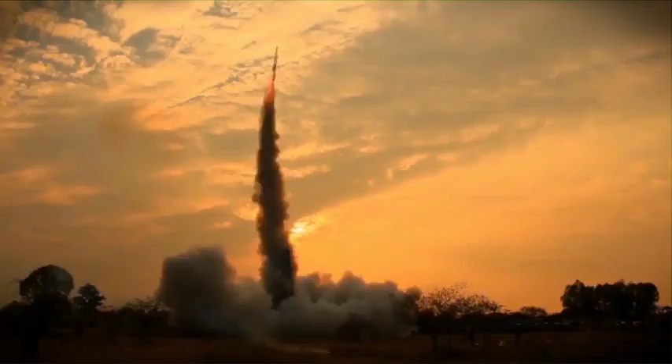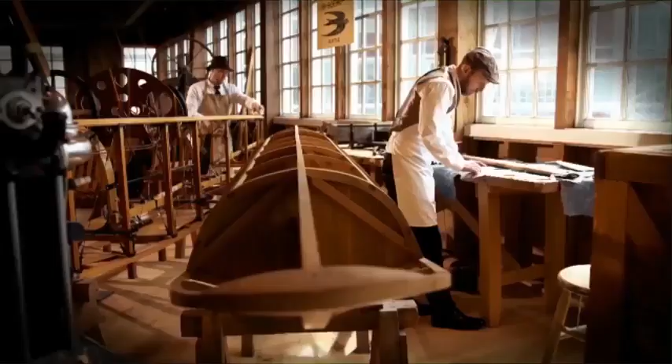There is a question as old as time, heard round the world and in every heart. It thrills the imagination and gives wings to possibility. Its footsteps fill history, and its hands hold destiny. It whispers in the dark, and its echo shakes the earth. The question called to those who came before, and they answered with the incredible. It urged them to start small and think infinite, to pursue possibilities and dream no small dream, to see a future filled with hope and unite to build something better.

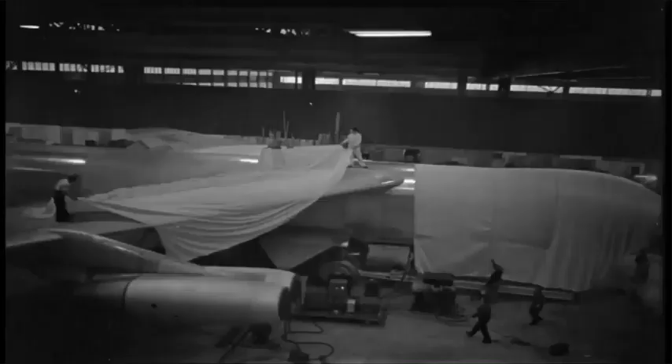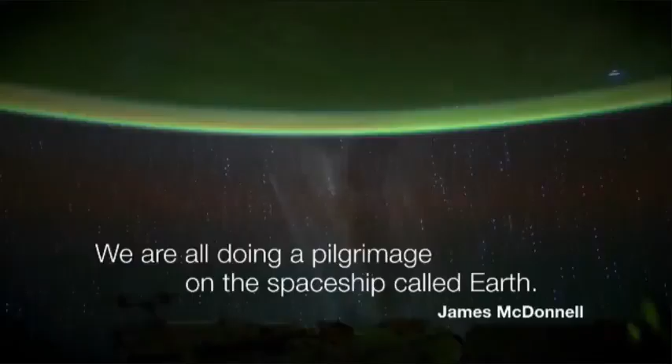Working together, they connected continents. Building the future of flight, they unlocked the stars. Leading their generation, they inspired ours. To dream high and fly far, to bind together and build the future. To lead our world and find new ones. To honor their legacy and leave our own. Our founders heard the call, and their answer lives on. From ocean waves to the edge of space, through our first century and into the next, their memory remains. Now, it's our turn. The question is calling louder than ever. What will we dream next?

All right. So I know it's after lunch, and it's in a dark room, and I've been in your seat before, so I want to get some interaction going. Let me ask a question. How many of you flew here to Boston? Just maybe take this opportunity to stretch.

And how many of you flew on a Boeing airplane? Lots of hands. How many of you weren't paying attention to what airplane you're on? You're just worried about what seat you were going to be sitting in. And that's not uncommon. In fact, if you think about what air travel has become today, we take it for granted. So I love the video that started this with looking forward 100 years.

So let's think about going back 100 years. What if we could travel back 100 years and you explain to someone what air travel would be like in 2018? Looking back in 1918, I think the Sopwith Camel biplane was the in-airplane. And so what would that be like?

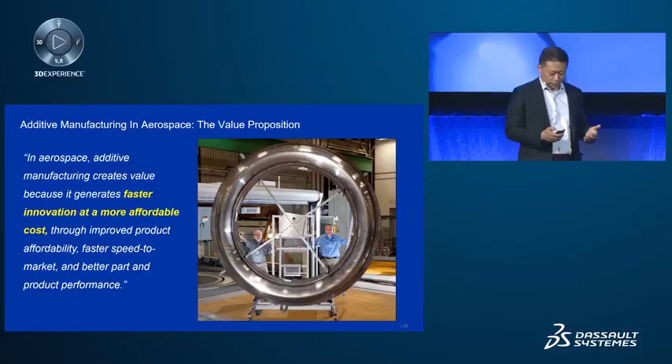So when we look at additive manufacturing today, it's really the next leap in technology, but it's very similar to the products we have. Instead of loggers and miners and metal forgers, now we're talking about spheroidizers and people who will make the powders that will produce the parts that we hope to make in the future.

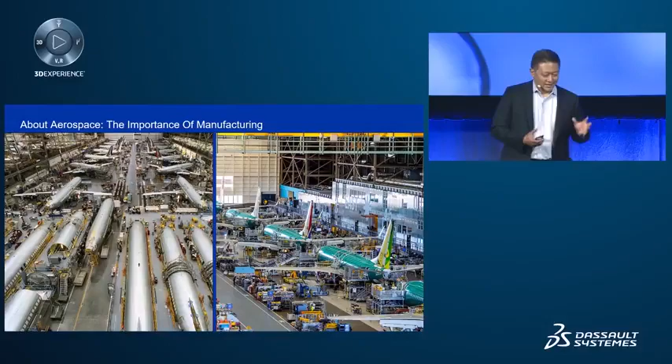The photo here on the left is our 737 factory of about a decade ago. You can see it looks very busy. It's got many bottlenecks in it. And as that production system started to advance and try to go faster, we just continued to find more and more challenges. And on the right is a photo of today's factory in Renton.

This moving line is one of multiple identical moving lines that are producing 47 airplanes a month today, going to 52 later this year, and 57 airplanes a month next year. That speed and velocity is tremendous for us. We've never gone faster in any production line, and additive manufacturing is one of the keys that we're using to help deliver that production system.

On the left, a manufacturing technician on the floor, if she needed some tool to help her build the airplane easier, would go to a tool design engineer, and then that tool design engineer might come up with something new and send it out to one of our suppliers, and maybe 1 or 2 or 3 months later, a tool would show up that would help to build the airplane better.

At today's production rates, more than 100 airplanes could go by before one of these parts could show up. So today we are deploying additive manufacturing down to the factory floor. We have engineers, tool designers, and 3D printers located on the shop floor, and it is enabling us to take sketches and turn those into tools and parts that help to build the airplane maybe the next day. And this kind of technology is something that we've applied, and it's really one of the keys that are helping us to move forward.

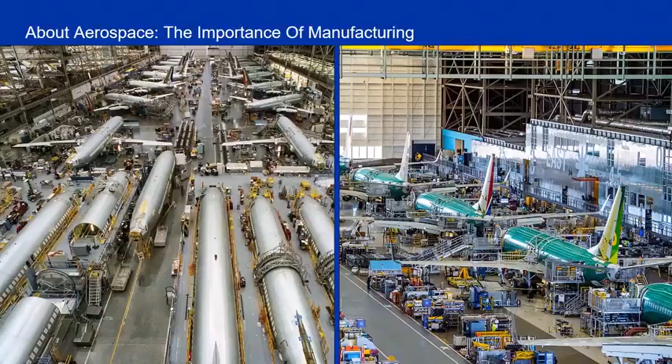On the left there is a galley fitting. It supports the galley on the 787. It's made of titanium, and it's a 3D printed part. It looks very similar to the machined part, but it was made using a 3D printing process called titanium wire feed. And it is the first FAA-approved structural titanium part to be flown on a commercial aircraft. And as of now, we're delivering them on all of our 787s.

And this part is made with an additive process where the wire bead of titanium is put down just where it's needed, and it's something we call a buy-to-fly improvement. Traditionally, this part would be made with a block of titanium, which is very difficult to machine and very expensive. And with this process, we're able to put just the right amount of material in the right places, and then significantly reduce the amount of machining that's required in order to produce the part.

On the right is a prototype we have. It's called the snubber fitting. I have one in my pocket here, and I think it's maybe visible on the screen. It's a topology optimized design using generative design software tools, and it is on the 777 today. And we have created this to replace an existing machined part. It also has a very good buy-to-fly improvement.

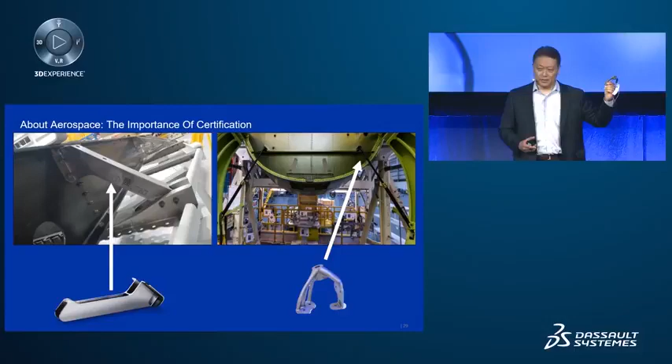This was built using a titanium powder bed technology, and it has just recently flown on the ecoDemonstrator program at Boeing. It was a partnership between Boeing and Federal Express, and we flew this on a 777 freighter for several months, along with about 30 other new advanced technologies. And this part is one of our first that we're trying to additively produce using titanium powder bed technologies and move that towards production.

So Boeing is not new to additive manufacturing. In fact, we have been in the business for roughly 20 or more years, and we started with things like stereolithography. Very first 3D printing, when I first started at the company, I remember having these yellow models that were just basically polymers that had been 3D printed, and they were very expensive. And as we've seen over time now, my kids are using their desktop printers in their classrooms. And engineers all over the company are now coming into the workforce with 3D printer experience.

But the proliferation of that technology, I think, is still in its infancy. We are really just starting to see how the technology is taking off. But at Boeing, we have been doing this for a while. It's been more than 15 years since we put the first 3D printed part onto one of our aircraft. We have a number of parts flying today, both in commercial and military aircraft. More than 60,000 parts are currently flying. Many of those are polymers. And what we're seeing today is an advancement of new metals technologies, and that, I think, is where a lot of this industry is headed.

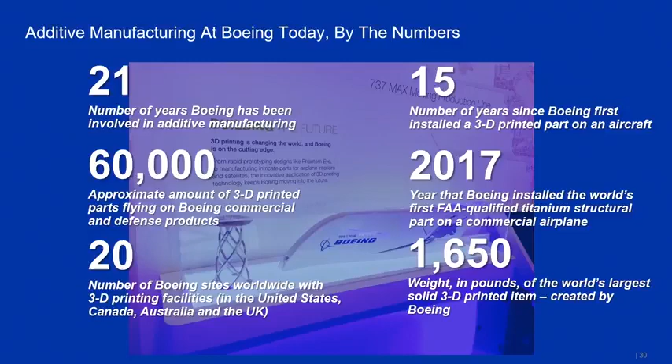We also created the largest solid 3D printed item, and I'll show you a video just here in a moment, together with our partners at Oak Ridge National Labs. So maybe we'll go to that, and let's see if we can get this to play.

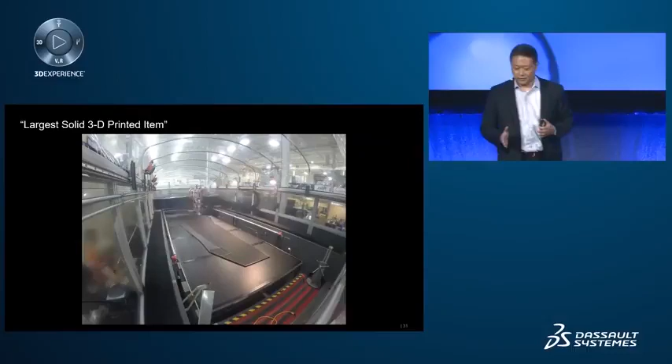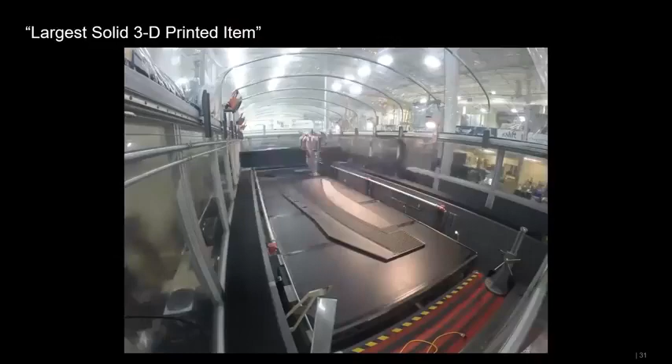So it doesn't have any sound, but this is a large area polymer printer at Oak Ridge National Labs that Boeing partnered with to fabricate a tool for development of the 777X program. And at one point, this was the world record holder as the largest 3D printed item. It was over 1,600 pounds, and I'm told it took more than 30 hours to print. And it's a little long, but you can kind of see 30 hours sped up over a few seconds. So maybe we'll watch this just for a moment. You might be able to pick out what kind of tool it was for by the shape of what's happening in the middle of that printer there.

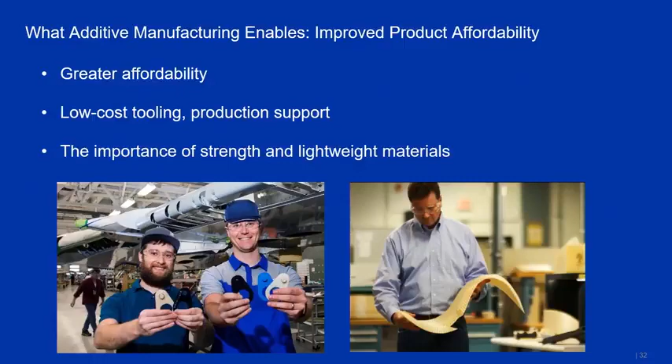All right, let's move on. So one of the things that additive is giving to us is greater affordability. And as you saw, low-cost tooling and production is one of those key areas that we're finding great value in. In fact, some of the tools we produced have saved as much as 80% over their original traditionally manufactured costs. And the speed at which we're able to do this is significantly faster.

Those two gentlemen there on the left are holding up just some very small printed tools that assist the assembly of the 737. And like I mentioned earlier, these innovation cells that are on our factory floors, these guys came up, asked for help to assemble the wing because we were finding that downstream in the production system, if they weren't accurately aligned, then we would have quality issues and we would have to be reworking the airplanes before delivery.

And so these guys came up with a very simple solution of just these small plastic parts that can help to align the bolts assembling the wing. And they were able to get these printed. And now every airplane going down the line is coming out perfectly.

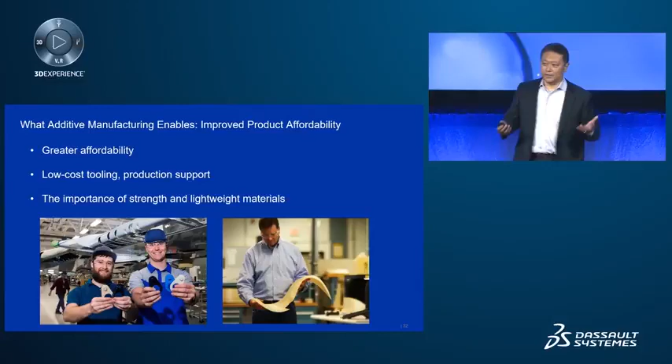And on the right is a flexible 3D printed honeycomb structure. If you're familiar with some honeycomb core that's used in a lot of interior components on the airplane, it's a very stiff material and it's not very flexible. It creates a lot of challenges with the production, and so new 3D printed technology is being applied to have flexible tooling or flexible cores that will allow us to build the airplane easier. And they also are reducing the weight of the products through various technologies.

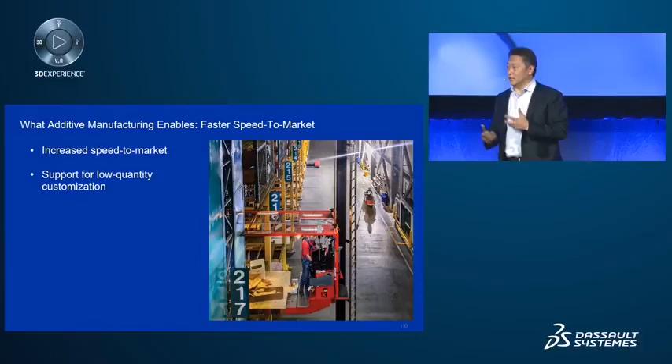We're also finding that there is faster speed to market as we move forward. Being able to produce the tools like in that video, we are able to take what used to be a flow of 3 to 4 months to acquire a tool, and nowhere near that large. But to be able to acquire large tools took many months to produce. And now, as you heard, that part was printed in just 30 hours. And so we can significantly reduce the time to market. It allows us to look at more customization and be able to take things like interior components on the airplane and customize those for individual customers.

This part here is off of one of our satellites, and it may have already been launched into space, but it is a radar array bracket, and it looks pretty normal, but it's been 3D printed using a titanium process, and it allowed the engineers to combine the functionality of multiple parts together and package them in a very tightly controlled environment that would allow the satellite to deploy some of its antennas when it reached orbit.

And we now have hundreds of satellite parts that we are designing and developing to put up into space. And that functionality is significantly helping us with the design envelope of being able to package satellites better and reduce the payload weight.

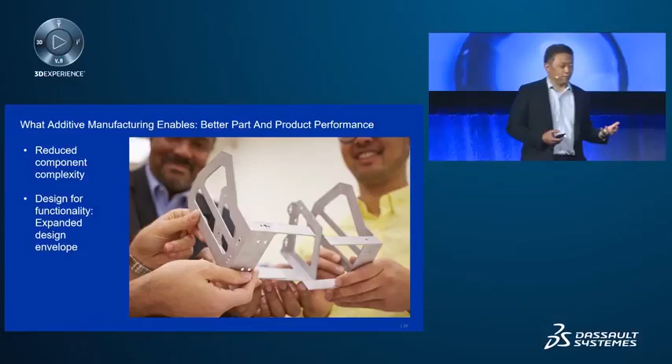Additive does have many challenges. Some of those are part size limitations. The printers in metal parts today have not a very large build area. The materials are very expensive as well, so before you were able to print, you need to make sure you've got the right design.

And the role of our regulators is key in the aerospace industry, and how we partner with our regulatory agencies is going to be really important going forward as we work to look at implementation of these new technologies and keep them aligned with us and partnered together so that we can certify the parts and we can get them approved and onto the airplanes, because the most important thing to us is safety. And nothing is more important than safety.

If you think of that story I told at the beginning of trying to explain flying in a 737, you know, flying, it's safer than driving to work. It would be safer than 100 years ago than riding on a horse. So we don't want to do anything that would mess that up.

We also are challenged by talent and being able to attract and maintain and train those engineers and retain them in the environment that we have, where additive manufacturing seems to be taking off everywhere. And so we are partnered with some of the universities and other industries to help us train our engineers. In fact, Dassault Systèmes has been very helpful in training our engineers with the 3DEXPERIENCE platform.

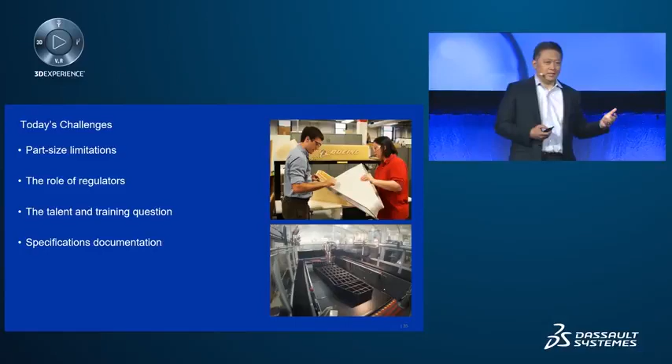And finally, there are specification documents that are very important for production of parts. And that's an area where it's a very big challenge today to have process specifications, material specifications that are consistent when we have many new industry entrants into the additive space. They come with new machines, new technologies, new material systems, and none of these are consistent across the board. And so managing that and being able to control them in an environment that would allow us to produce parts that we can put on the airplane are another challenge for us.

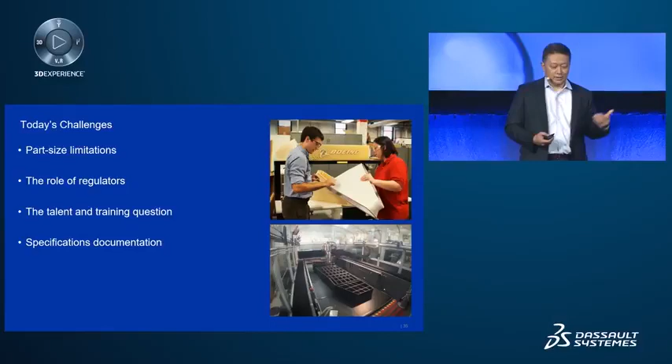Now, fortunate for us with our partnership with Dassault Systèmes, last year after an exhaustive evaluation, Boeing chose to adopt the 3D Experience platform as part of our digital transformation. And my team, most recently, has had the opportunity to use the additive manufacturing platform. This is a little busy chart, but I'll try to walk our way around it. You saw a little bit of this in Bruno's presentation.

So we'll start at number 1, where we are able to use an analytics tool to look at the geometry of the parts on our airplane, the millions and millions of parts on our aircraft, and start to evaluate them based on geometric features for candidates for additive manufacturing. And then as we create those models, we're able to really functionally generate the additive space, the design. Just like that part I showed you, it uses a topology optimizer, and it looks much different than any traditionally machined part, and it cannot be made by a normal machine process.

This type of design, using topology optimization, in the case of this part, reduced the weight by about 30%, and we cut the number of fasteners it takes to assemble it by more than half. So we're able to take that technology, apply it to the design, and then also start preparing for printing. As I mentioned, printing materials are very expensive today, so you don't want to fill your printer with your expensive powder only to find out that the print has failed or that it is warped. So by being able to prepare the models, go through the manufacturing simulation, and compensate for the design as you go through that simulation, that integrated solution has been a tremendous help to Boeing.

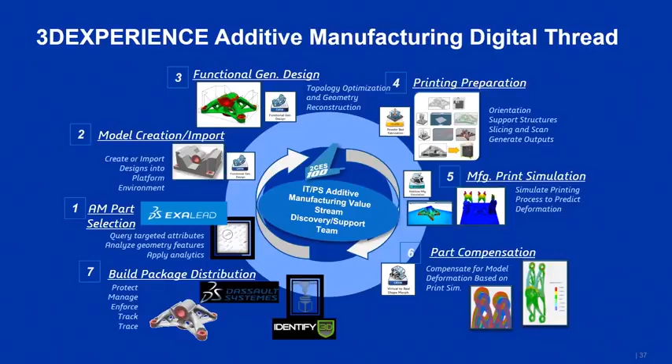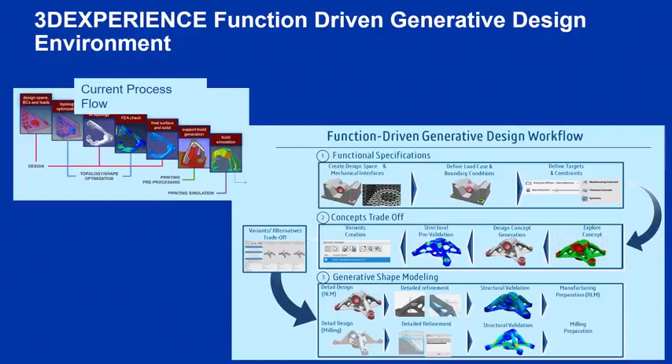This chart displays the experience that our team has had. The current process is what was used to design this part. It requires a lot of import and export of files to different software packages. This is kind of an industry standard today of different software packages used for topology optimization, for finite element modeling, and for the build package requirements to design support structure and other things. And each of those translations are prone to errors and translation differences.

What we found with the 3D Experience platform is that this has been integrated. That tool has now combined all of these different functionalities into a single package with native CATIA geometry, and we're able to translate those models into the finite element system, into the build files, and the analysis of the build files to compensate the models. All of this activity that was taking weeks to months in some of the original designs, the teams are now able to do in days. So we're seeing a huge benefit from the software. And we've now got several dozen of our engineers trained in this package and applying it to our new designs.

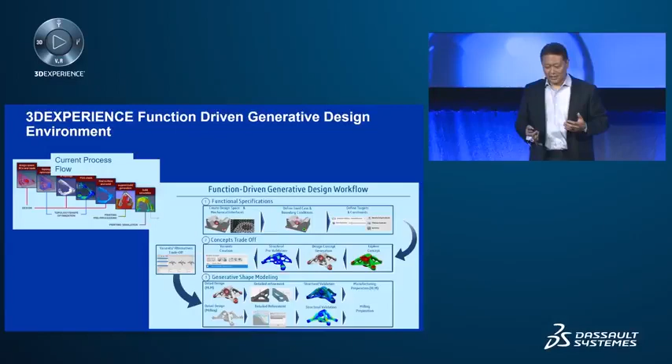But I think the biggest value of additive manufacturing is going to come from the engineers using the tools available to them to design something that just cannot be produced today. It's parts that will not be made with a traditional manufacturing method. These are the kind of parts that we will design in the future that will truly transform aerospace and engineering. And so I'm going to leave you with the question from the video, which is, what will we dream next?